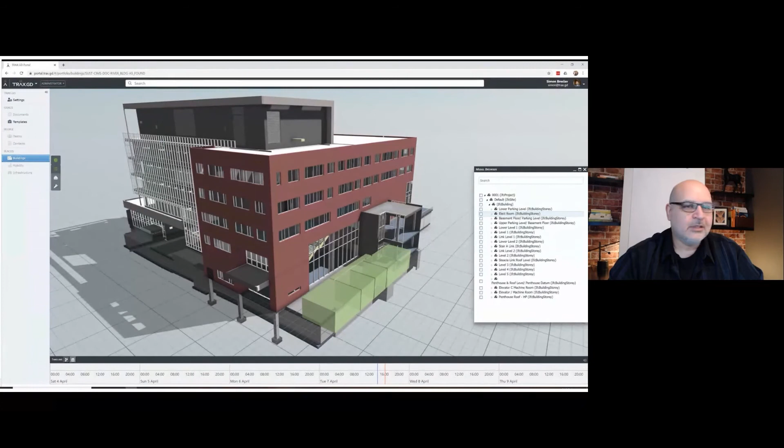And the digital twin, of course, still serves all of those kinds of things. Here in our tool, for example, I'm just showing a couple of the Carleton University buildings. If we select Richcraft Hall, we can load the IFC in the Trax viewer and see the time of day in the timeline, and some of the components on the right in the browser. We can step through the different floors in the model browser to see the internal structure. Then I have a little video here that I'll play.

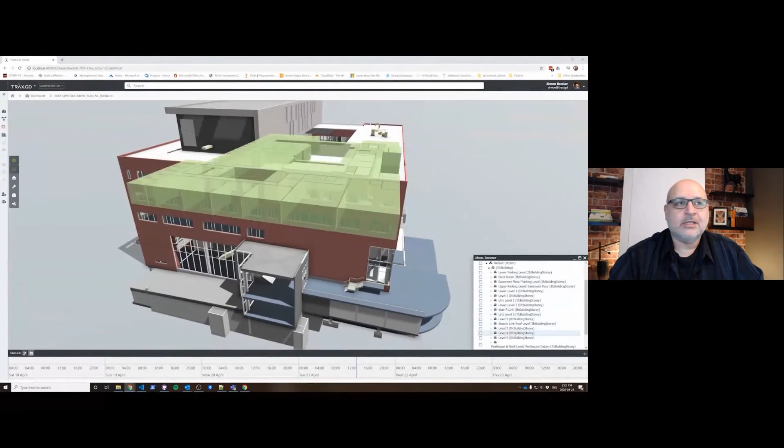It shows turning the model, selecting a floor, showing the sensor dots, turning them on, hovering over them and seeing the spark lines of recent values. We can also enable the heat map view to visualize the temperature of the room containing the sensors.

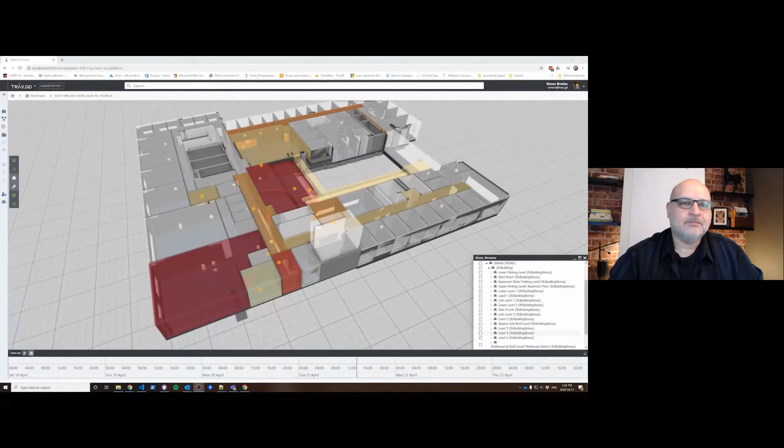And while we might be used to seeing these kinds of things in a digital twin, even here we're still missing the goals, the expression of the goals, and a comparison of the goals to the current state. This is where the, in quotes, new concept comes in. The key question is, how do we express the goals in a continuous improvement process, so that not just the digital twin can get better, but the physical twin can also improve over time.

So in zooming out to the broader process, we want to begin to encode the standards that relate to projects at different scales. Here back in the software, you can see we have enumerated some of the standards that we're looking at.

Including the SDGs as the most general and broad one, the ISO standards, and so on. If we select the WELL standard, we can go into that one. And then there's a generic roadmap for the general WELL standard, and it calls on a number of subgraphs, one for each of the 10 WELL standard concepts, like air, water, nourishment, and so on.

If we click on the general roadmap, we can see the requirements graph here on the left, together with the Python code that aggregates the final step of the certification evaluation.

So you can imagine running one of these graphs inside of the larger hospital process, and the big inputs would be both the business commitment early on to decide which of these key concepts they want to support. In the WELL standard, there's required elements in each of these subgraphs, but in addition to that, there's the optional ones.

Yeah, that's a good question. Like the generative design process, if you're familiar with that, it involves solving a slightly more general problem than just the design at hand. So there's some overhead in doing a generative design project, where you try to solve a more general problem, and then you have parameters with enough extra space so they can be varied enough to generate a variety of designs rich enough so that the computer can help you find other designs you may not have thought of, or combinations of features that would have been difficult or impossible to come to yourself.

And so the advantage of having a computational process will only pay back if there's that level of complexity in the first place. So in a similar way, by encoding a larger process around what we'd typically include in the AEC domain, to include the full process, but also the life cycle, and making it ongoing, is overhead. So it's not going to be free. On the other hand, the larger and more complex a project becomes, the more payback there will be from implementing any of these kinds of things.

So the payback will far exceed the investment if we move to more complex projects like a hospital, for example. In a hospital environment there are typically other buildings related to long-term care, or testing facilities close by, and things like that. So as we move to multi-building scale, all of these things become more helpful, and having the computer help manage them and report on potential opportunities for improvement is helpful.

And then moving up to the larger campus scale, for example at the Carleton campus, we'd like to have the full campus project there. We can really start to move the dialogue from smart cities to a practical implementation of these things. But that increased level of complexity will really benefit from encoding standards and encoding things outside of the normal metadata we have in a project. And so as that continues to grow beyond a campus level to a city scale, or even a regional or national scale, you'd really have to do something like this. Otherwise, we have what we have today, which is standards that are difficult to interpret, and also become so abstract that they're hard to make concrete and implement.